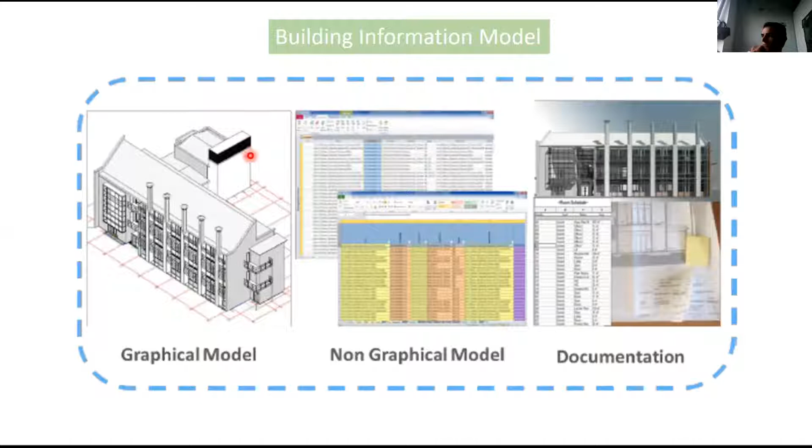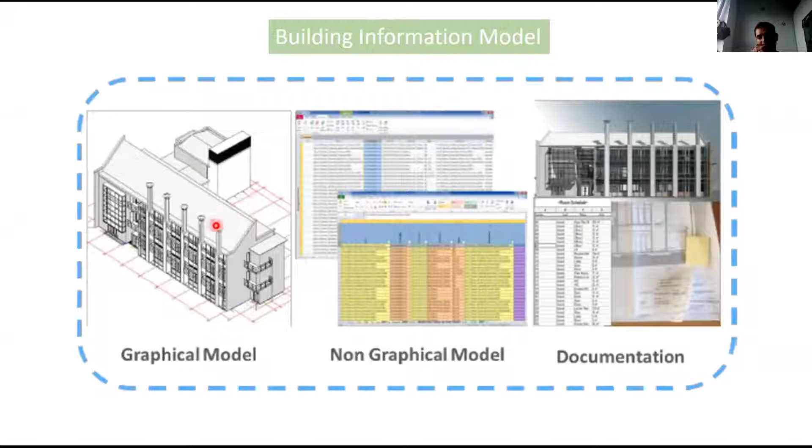The graphical models are developed in specific BIM authoring software using object-based technology to simulate the real world. This is different from 2D software like AutoCAD or even Vectorworks, where you have the X and Y axis and the Z. The most important thing is the coordination space, where you can link all the models from the collaborators. So in simple terms, BIM allows users to share project and asset information by mapping that data onto a 3D representation of building components that reside in the model.

The government created a roadmap specifying levels. Most of us know level 0, that is CAD, where we basically have the information on paper. Level 1 is a combination - we start to create specific folders on our server where we save schedules, Word files, PowerPoint. But after that, BIM level 2 standards start to appear, just to unify how we share information with engineers and architects.

And the next step is level 3, just to get an idea. Many of you are using Google Docs now, where many of you can access the same file in the cloud. That's the concept of BIM, or the goal of BIM - to use the cloud and have everyone store and work in the cloud.

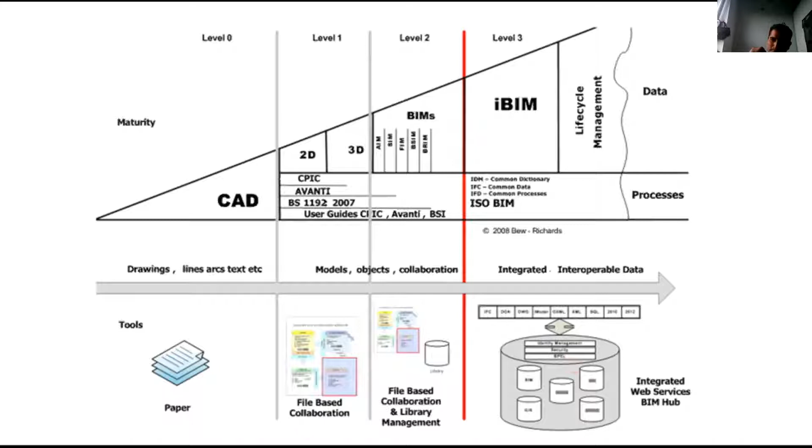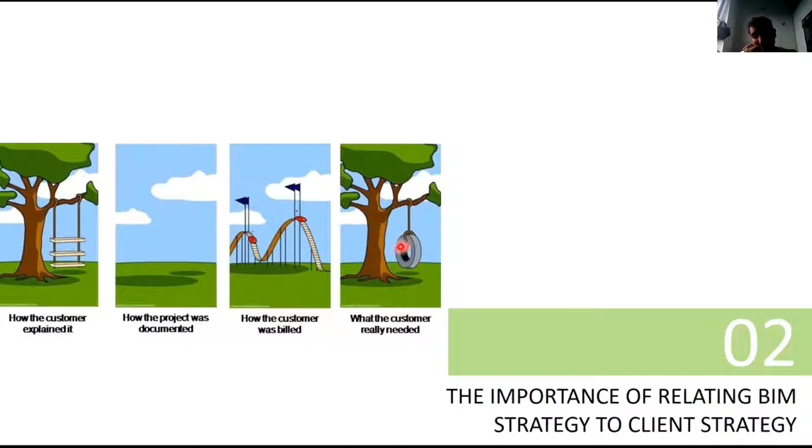If BIM is not aligned with client business priorities. The strategy for implementing it will become skewed towards improving internal and collaborative efficiency, instead of maximizing its overall effectiveness on behalf of the client. Instead, BIM strategy should, within the constraint of available time and resources, aim to maximize the value of the technology for both the client and the project team.

We start the conceptual design. Because BIM covers the whole life cycle, once we get the detailed design, we start to create the analysis and document all the process. But after fabrication starts, for the manufacturers it should come from Revit or another BIM software. When I say BIM, it's related to - could be ArchiCAD, Vectorworks, Revit. So it's not only one product, it's the way that the information is modeled.

So many times - I don't remember the building - but near the Thames, there is a new building, I think about 2 years ago, very close to the Thames, where the shape is very organic, all glass. Every single window is bespoke, and only 2 companies in Europe can achieve this kind of accuracy to cut every little angle of that facade. That's thanks to how the information is transferred from Revit to the fabrication.

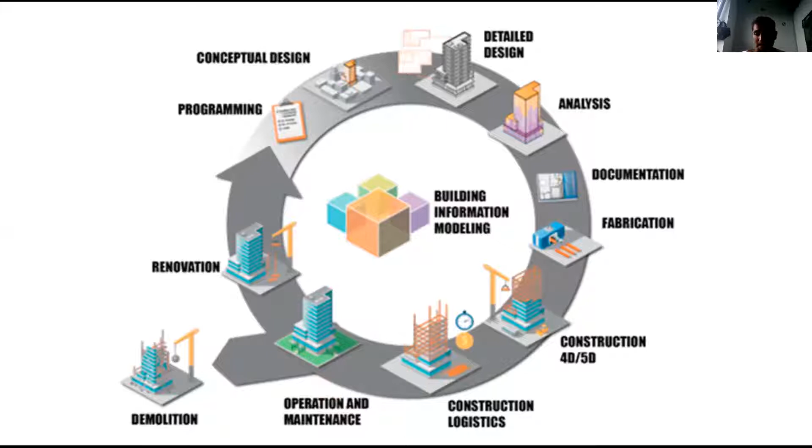But after that, as an architect or engineer, the project continues through life through construction, logistics, operation and maintenance, and that's where it starts to be more efficient for the BIM product - to facilitate the review of design options by automating the production of room data sheets from BIM, thereby significantly reducing the requirement for manual data. For every pound spent in design, 20 pounds is spent during construction, and 60 pounds is spent during its operational life. That means the operator can potentially save more in operation to pay for a better design and build process with BIM. So what we call BIM bam boom is better design, better construction, and better operation.

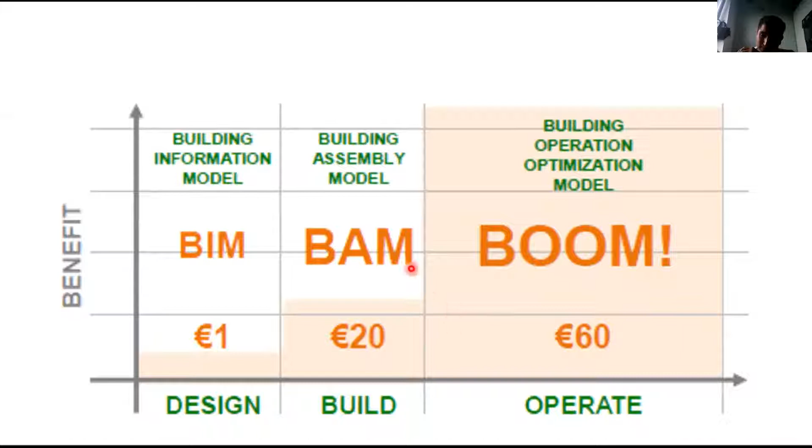Paperless job sites are something companies began implementing a few years ago. We are progressively moving towards the use of mobile applications, with multiple users accessing a database of information for quality control, verification of installations, and writing daily construction reports. You can go with your tablet and download information from the cloud and see all the parameters of an item or an object, because every asset's information will be stored in one single file.

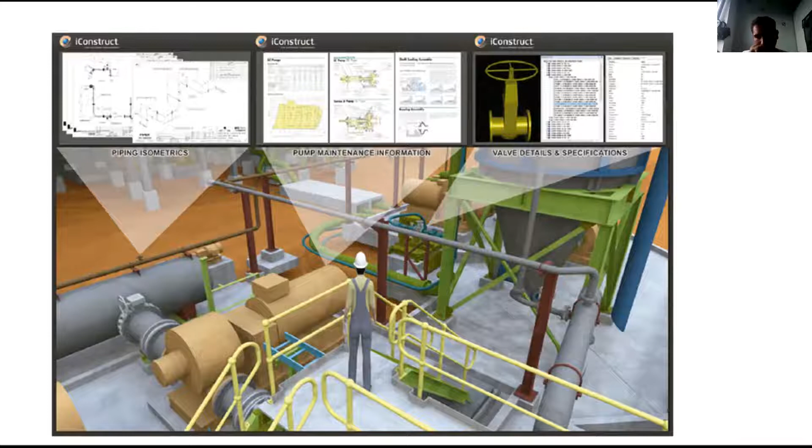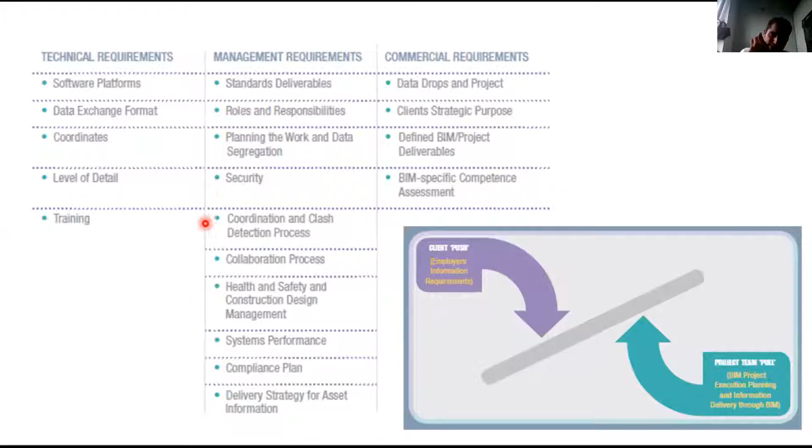To achieve that, one of the challenges when implementing BIM in a company is the information that the client provides to us. The process is that the client needs to provide us the Employer's Information Requirements. That basically is what they expect from us, or how we can deliver BIM to them. In that document, it talks about which software we are using, the level of detail we are providing, and the roles and responsibilities. All this is our response to the client through a document called the BIM Execution Plan.

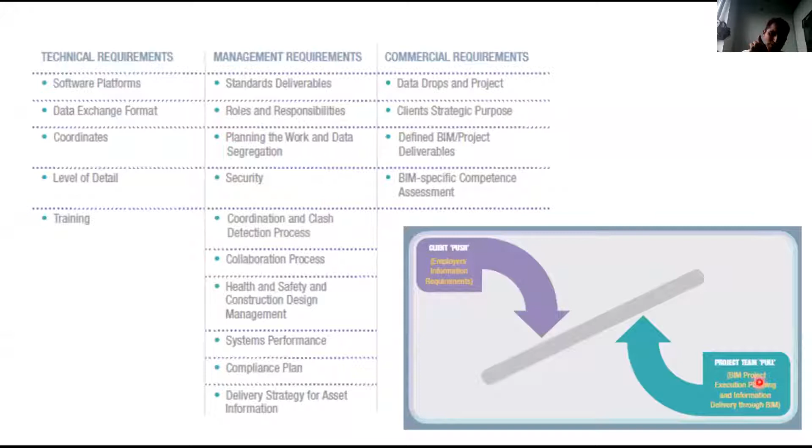That sounds very beautiful, but the expectation and the reality are totally different, because so many companies fall into a pitfall where they don't invest enough to implement BIM. I had the example of a company I was working with that produced a very detailed model in a luxury residential project, but at the end they lost money because they implemented BIM without any expert. I mean, to implement BIM, we need a person who supports us in every step of the roadmap.

For the implementation of BIM to deliver measurable success, there is considerable evidence that the innovation pushed together with the technology facilitates beneficial change. So once we got BIM, we need to consider where we are, which employees, or the skills that our staff has.

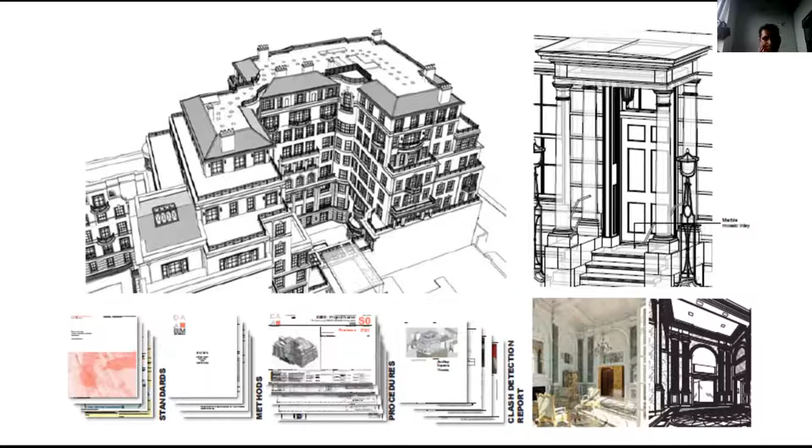So that's an example of how a project could be broken down into different models, and that's giving you an idea of how things are connected to each other.

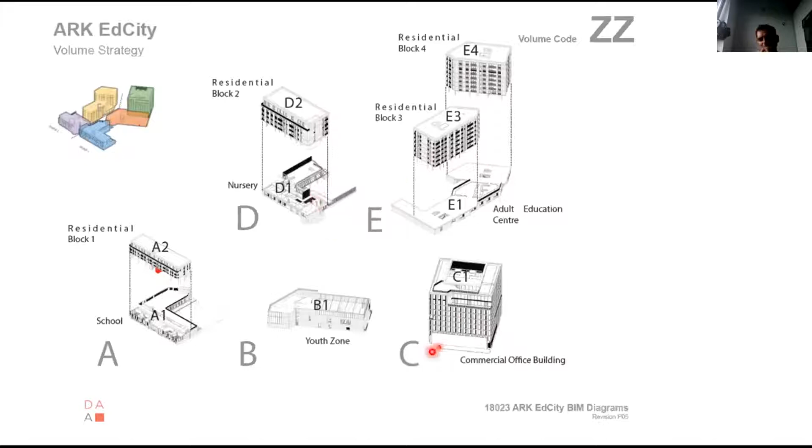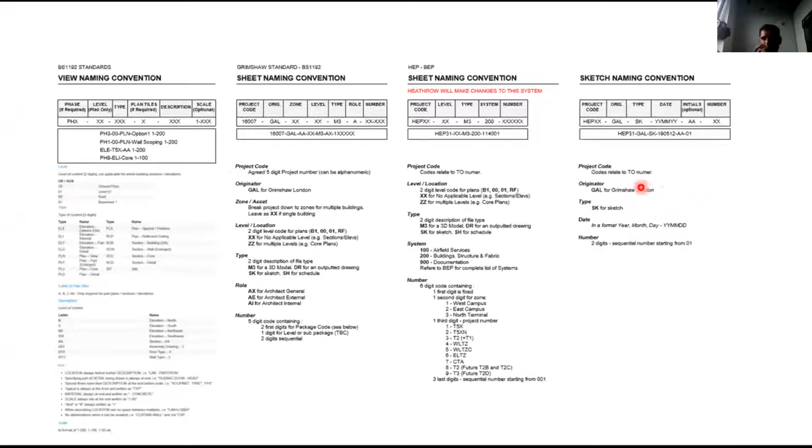So here basically the way we need to care about the naming convention, the sheet naming convention, it's like in CAD, but in BIM there are more standards we have to follow. And that's basically because we need to collaborate with engineers, and that's a very standardized method of producing the information.

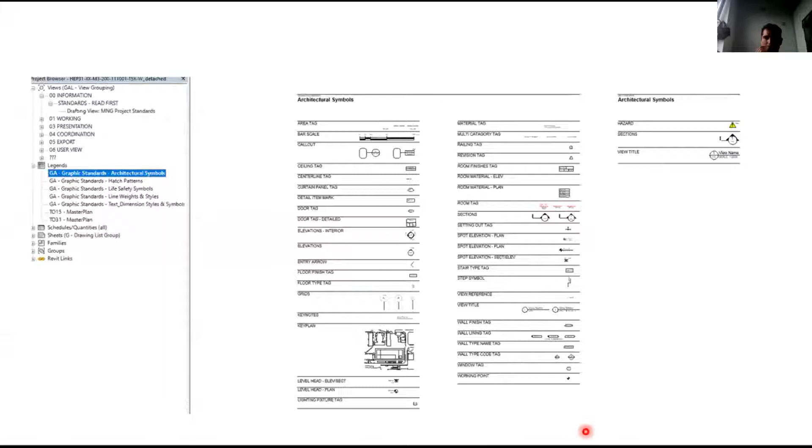One of the challenges of BIM is that in CAD we have such a big library that we can adopt families from everywhere. But in BIM it's something different: every company is starting from scratch with the library, and that's a big challenge for many companies because people are still using or adopting BIM strategies for the company.

Is your organization improving their BIM skills overall? Yes. It's more common that companies are investing money in, for example, design technology teams where they provide solutions for the whole company with BIM and for BIM.

Is the BIM implementation going in the right direction? Yeah, definitely, people agree that's the present and the future. And should your organization be more strategic about BIM across the office? Yes, that's definitely another topic in each company I was working in.

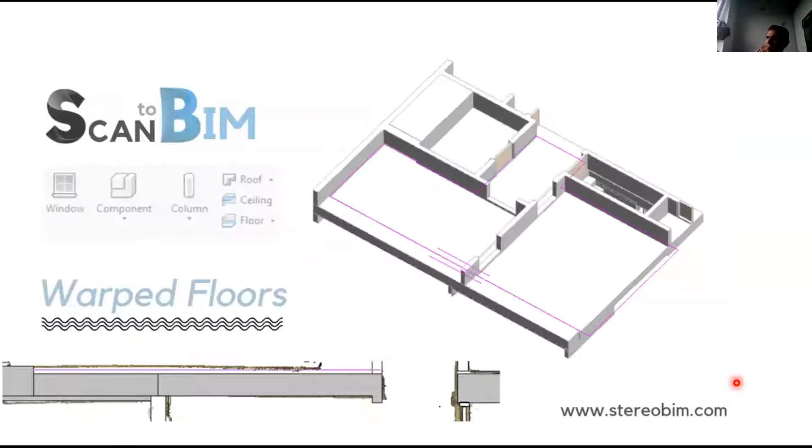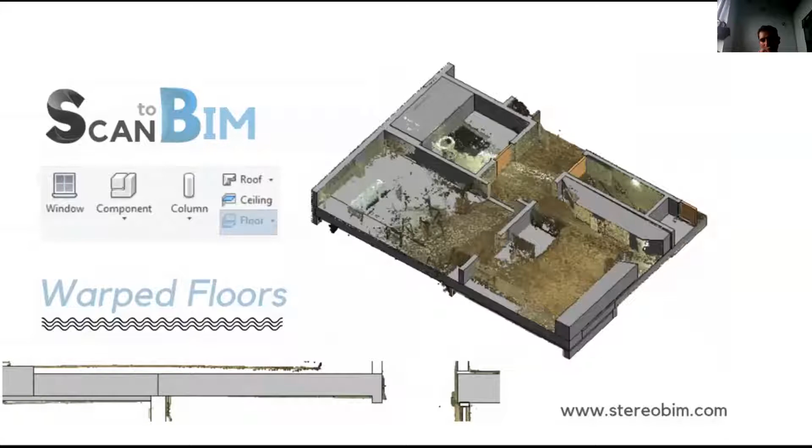One of the tools is the scan, the possibility to scan your room, just to highlight an example, with your phone or with a laser scan, and in BIM you can recreate it all in the model, or even with parametric tools where with simple dots you can create a stadium roof or very complex shape with a few steps.

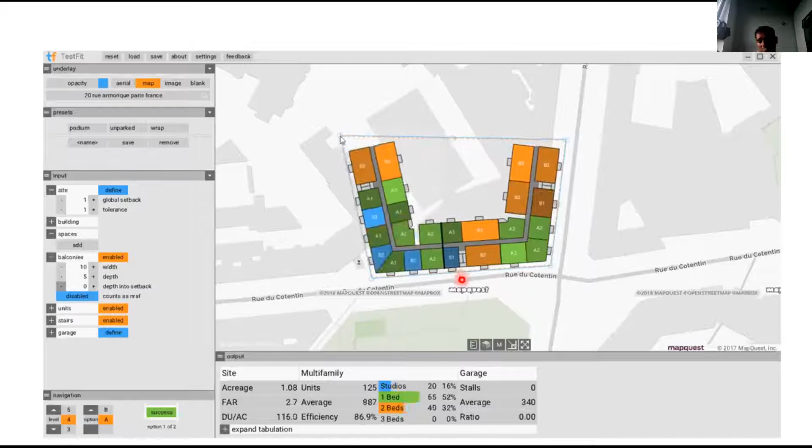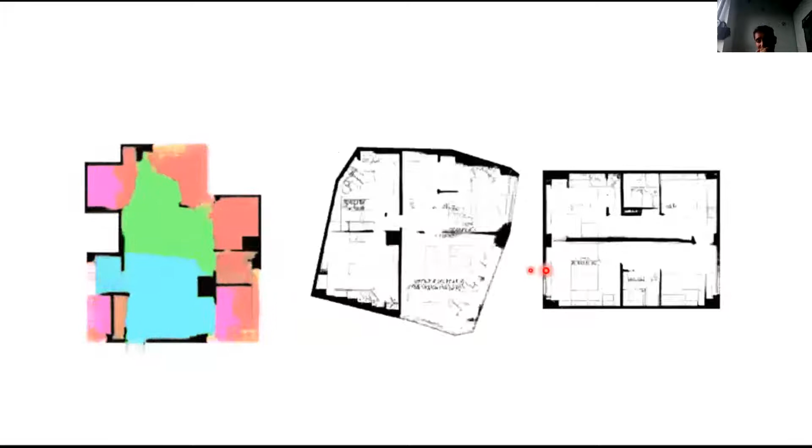We can achieve this as well with data management. We can create such a, in my opinion, constrained building, but it could provide a quick solution for planning, for concept stages, giving the client quick visibility of what they want to achieve. That's the complexity of the automatization of the new era, where simple numbers are combined to give you the best answer for the client.

So we've got several options where we can discuss again with the client, and in a few minutes we can get like 20-25 results per session. But it's true that all this has a long process, but in the long term it will be worth it, especially when you establish your own workflow for other projects.

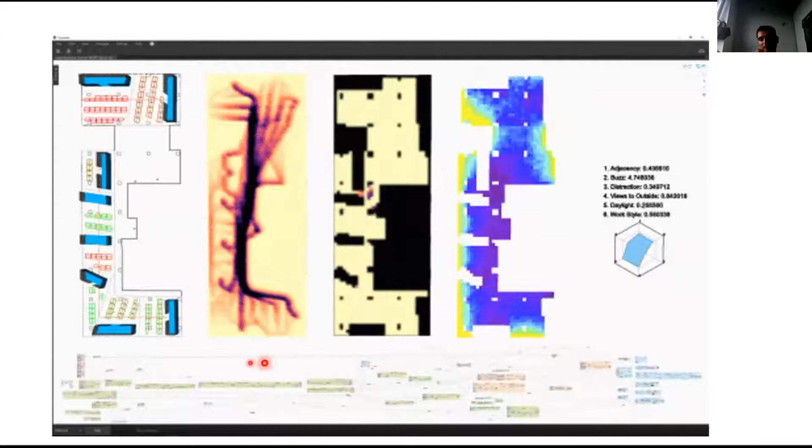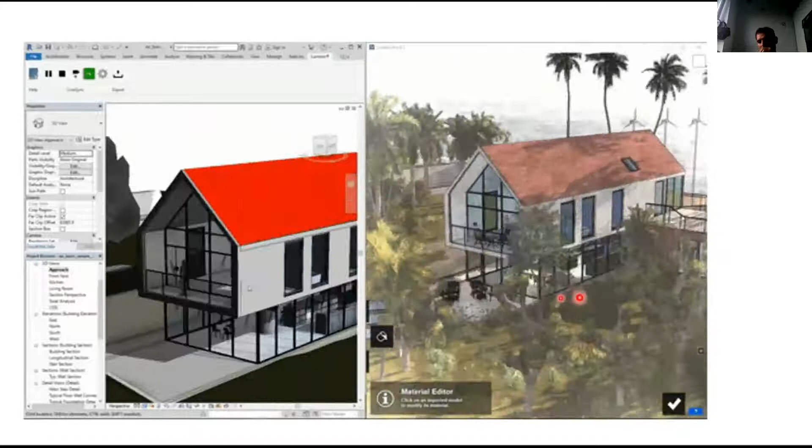Regarding visualization, it's more often that BIM contains third-party plugins where you can visualize in real time. At the same time, your client can see the house with a mobile. The software analysis tools are improving as well a lot in BIM, where you can immediately know the impact of the lighting in your building.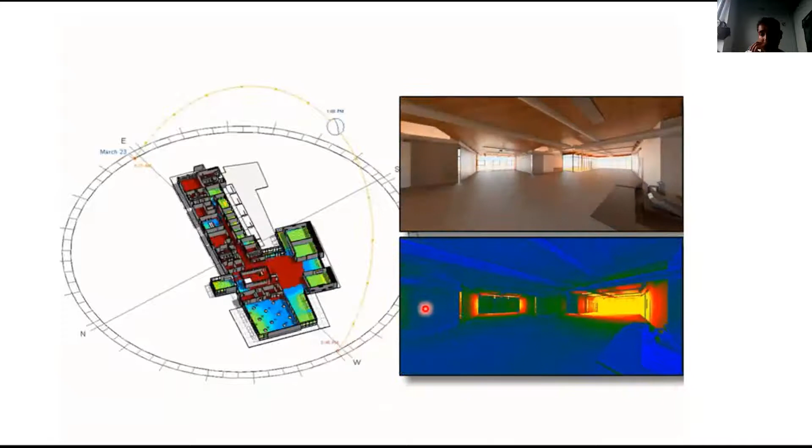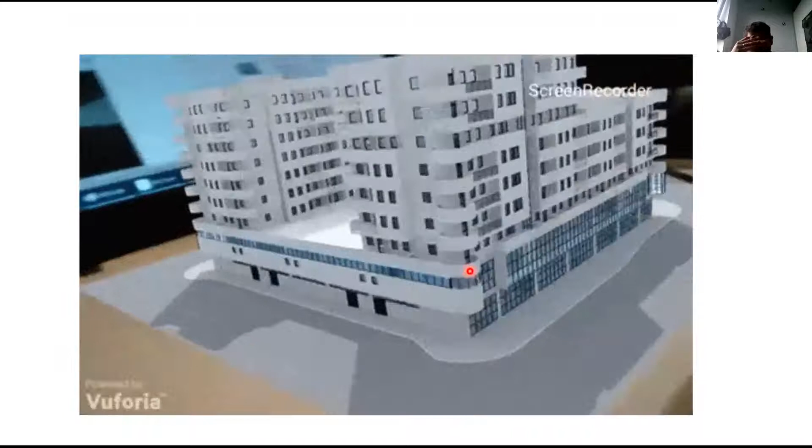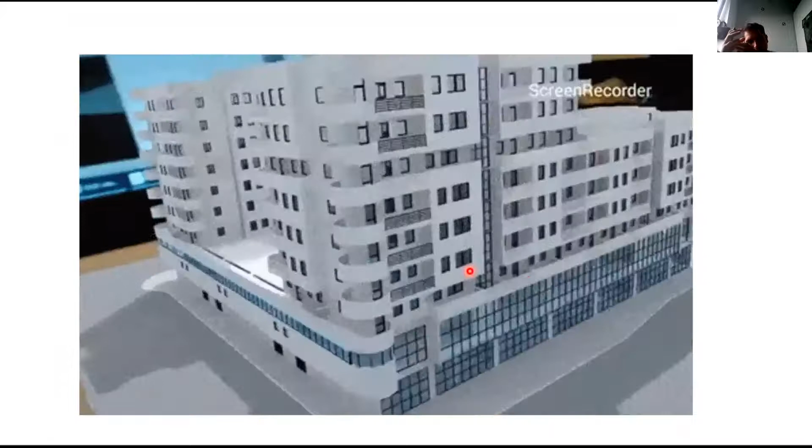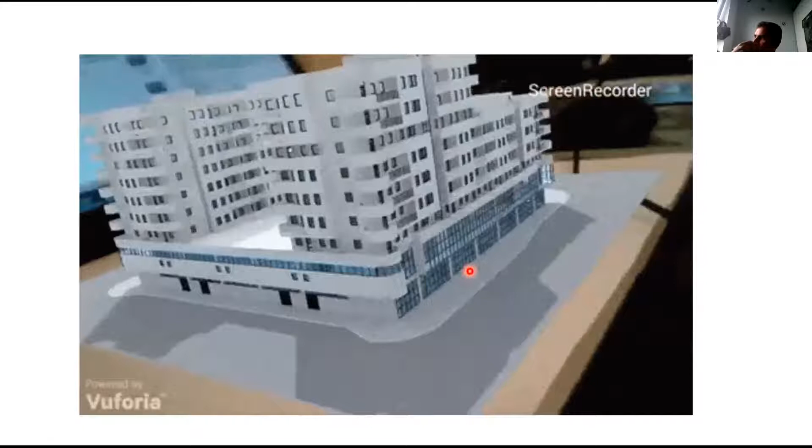The augmented reality we had in the consultation period in the Heathrow project was very cool because people just get an immediate idea of the overall project. I remember in the exhibition that was in the Excel building, there were too many people just saying, 'Oh, I think that should be the way people need to present the buildings.'

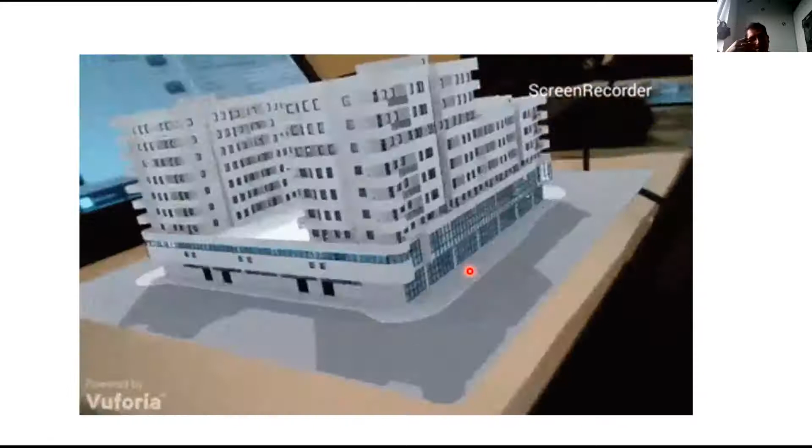I can't disagree because before being an architect, I was a model maker, and I think that until our kids grow up, we still need the physical model. But probably our kids, when they grow up, for them it will be enough just to see the objects in virtual reality.

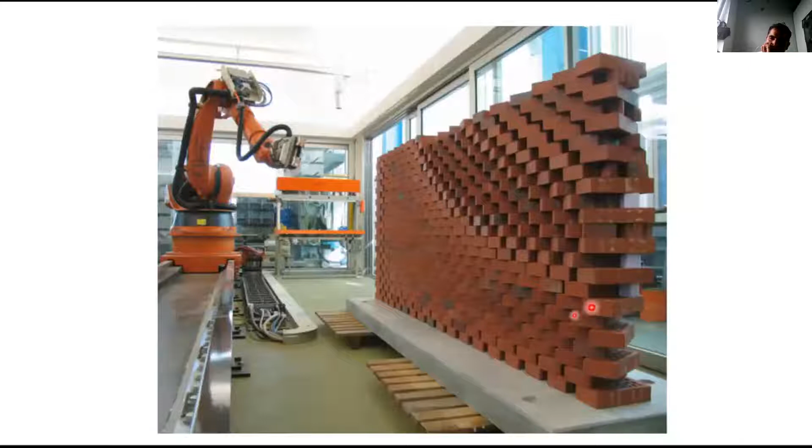And the last is just the fabrication. It's possible to create bridges, complex facades with robotics, and all this information is through the asset information that we transfer from BIM to our machines.

So I think again it has good expectations, but the reality is that all this software in the very beginning is such a pain because, like all new things, people need to dedicate time for training and research on all the tools before applying them in a company.

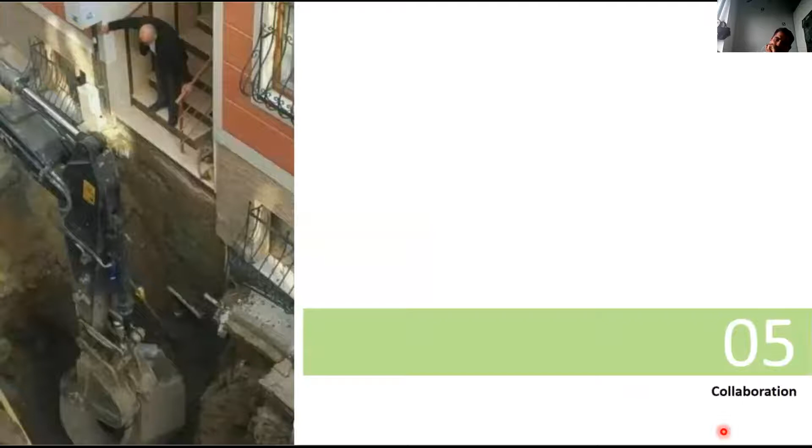The other challenge is the collaboration between consultants, because we are working in a way that we are interacting with our architectural model, and we are interacting with the structural model, the MEP model. So once we get stage 4 finished, the site manager and project manager will start to play with our model, and all this is like a cycle, like the never-ending story.

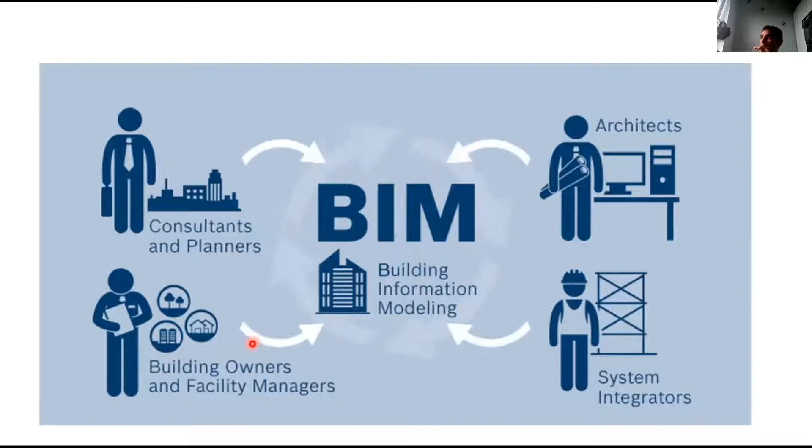Even when the building is finished, the file again is stored, and we will have all the information in one single file.

So we manage all the information through what we call the common data environment, and basically there are 3 or 4 spaces where we work in progress. We start to create our documentation, the schedules, and the model, and we share it in a space for the MEP and structural guys.

So once it's approved, the information could be published, and it will be moved into another data environment called published documentation. If it's rejected, it will go back again, and the file will not be stored in the shared space. This process is just to make sure that the delivery process is going according to the standards and is efficient for the team.

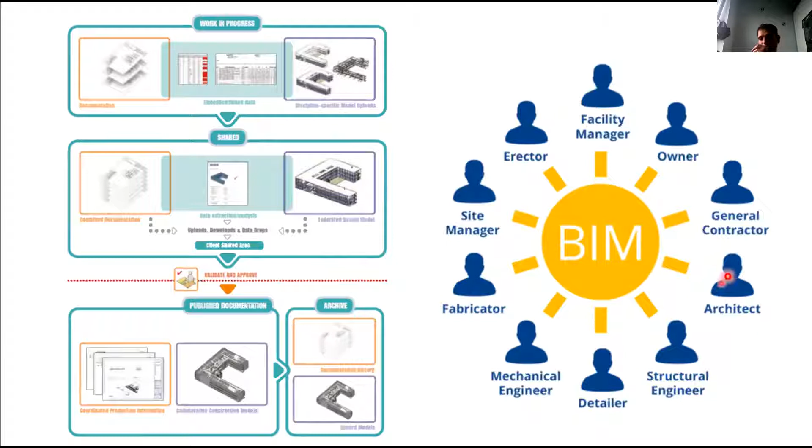So when we publish the documentation at the end of a stage, we can archive it in the stage 3 folder, for example, or stage 4 in the stage 4 folder. And after that, it can be accessible for each stakeholder of the project.

When we are doing the drawings, we have to make sure that we provide the information required, because we cannot over-detail and we cannot under-detail. Obviously, the more information you provide, it can in fact be a way to improve the quality of the building, and fewer questions you will get from the builders or contractors.

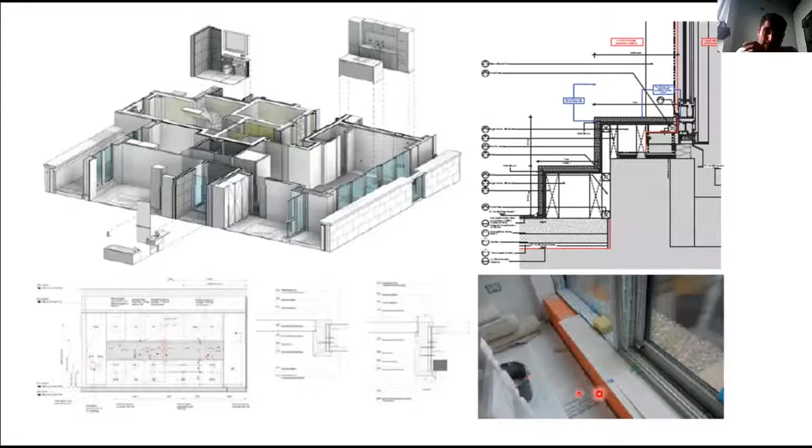And this is an example of the project that I'm working on, near Clapham Junction. That's B&Q and Homebase, and there are 18 buildings.

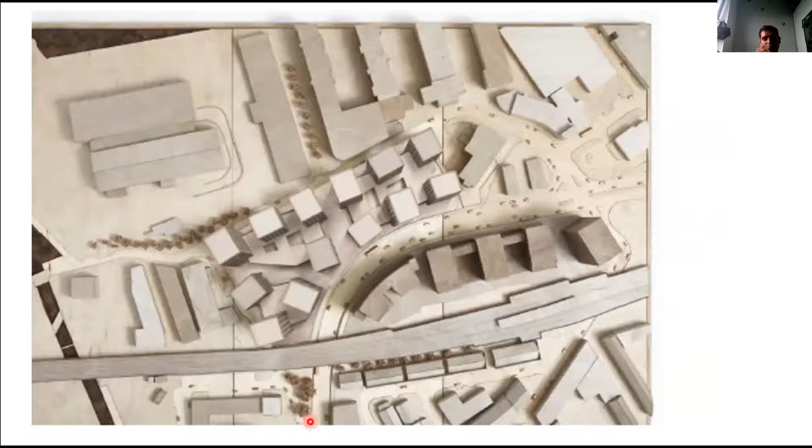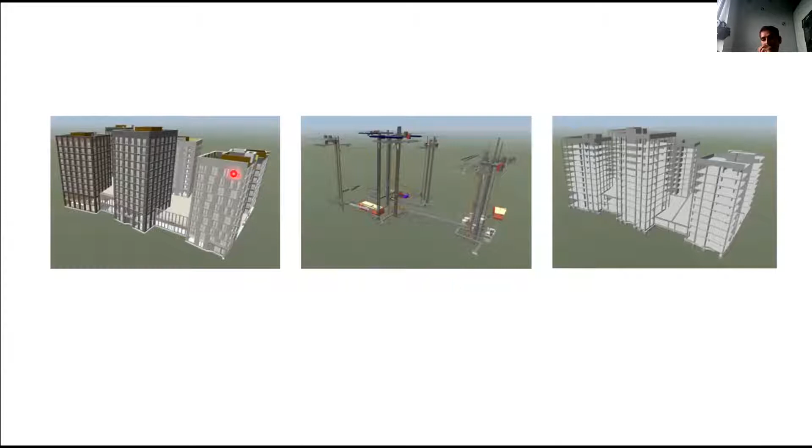Coordinating them is a big challenge, because we are working with Ramboll and Hoare Lea as consultants, and now we are providing a new tool that is improving our way to communicate

and reduce email. So as you see here, we've got the three models: structural, mechanical, and architectural. Just an example of how we use a software that is reading the Building Information Modeling. From here, we are doing the clash detections and providing to another software that makes it easier the way that we communicate. And the first question you can have is, why are we using so many software? Of course, because BIM is something relatively new, and each software is implementing others.

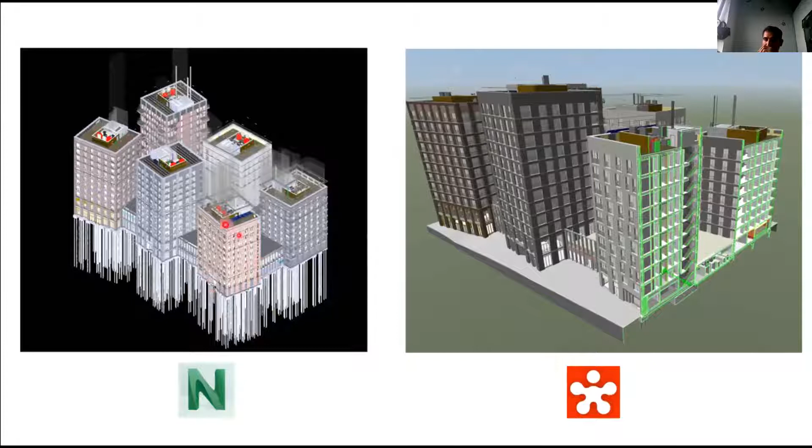So I assume that next year, probably this software will supersede this one. But Navisworks now is providing us not only clash detection, but also managing the cost of the building and the timeline production. So we'll see a bit of that in a sec.

So that's Revizto. The way that we communicate is just live. So I just add a stamp, and I can tell the engineer, please look at this. At the same time, he's receiving the information and he can respond. So all this is issue tracking that will be stored in the cloud.

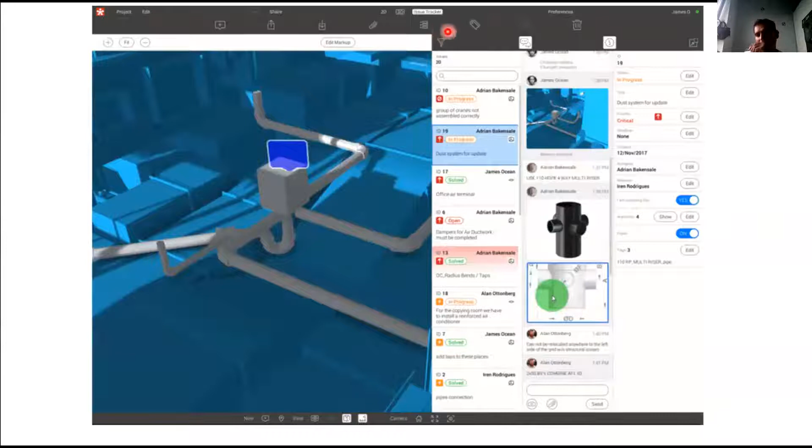So we will get rid of thousands of emails, and through the filters it will be very quick to spot the issue, who it was assigned to, and the priority. It will be just highlighted when it's achieved or if it's in progress, and for coordination that's a very, very fantastic tool.

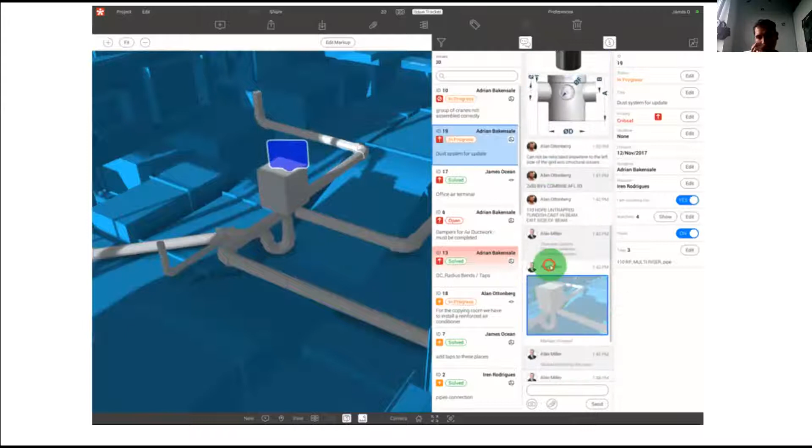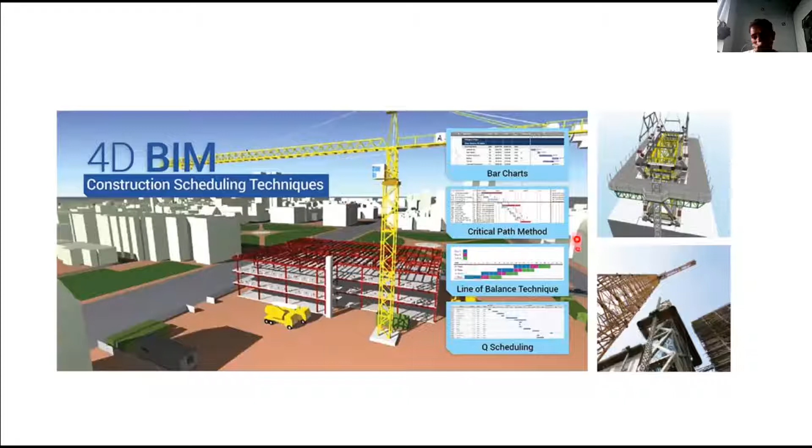As I said before, Navisworks has something that Revizto doesn't have: the tool for scheduling the construction. So Navisworks can provide schedules, line of balance techniques, and very useful and powerful tools just to get your construction a success.

And that's before the construction, but during the construction, there are tools where you can have your 3D model and compare the stage you are in with what's coming next, and you can identify problems before they happen.

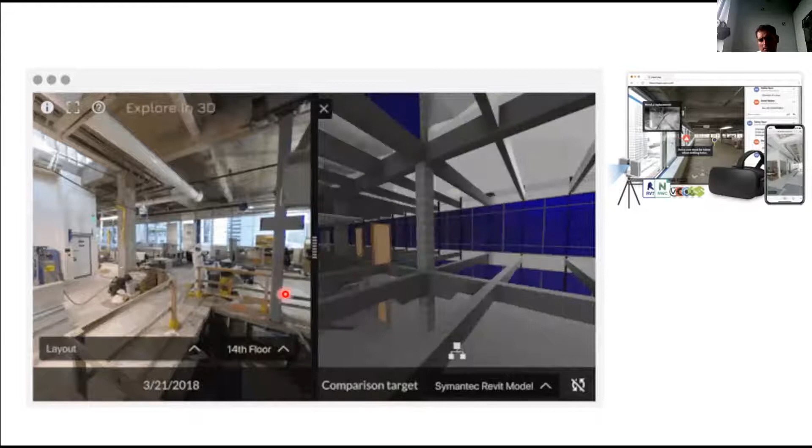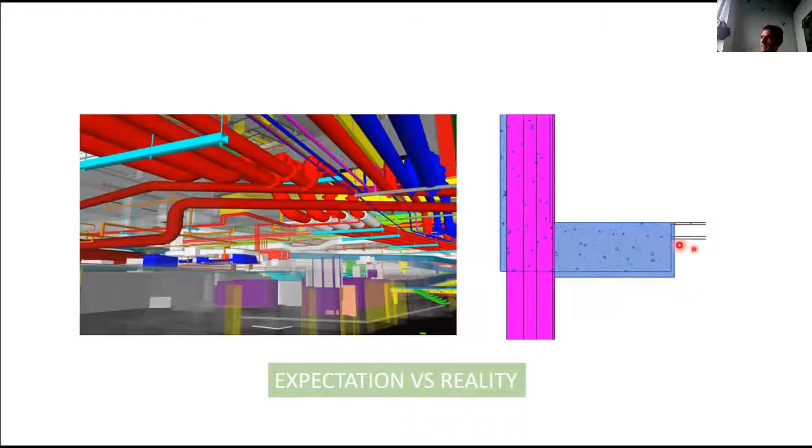And regarding collaboration, again, the expectation is to have nice, clean clash detection between the elements. But the reality is that it's a big challenge to get everything nice, because that should be accordingly to the skills and the tools that the company has.

So this is a diagram where you can see the first time how long it takes in comparison with our CAD tools. But once we get the maturity level to provide our BIM model, it will be saved nearly 35% in the second project. Probably you will see the 35% of benefits.

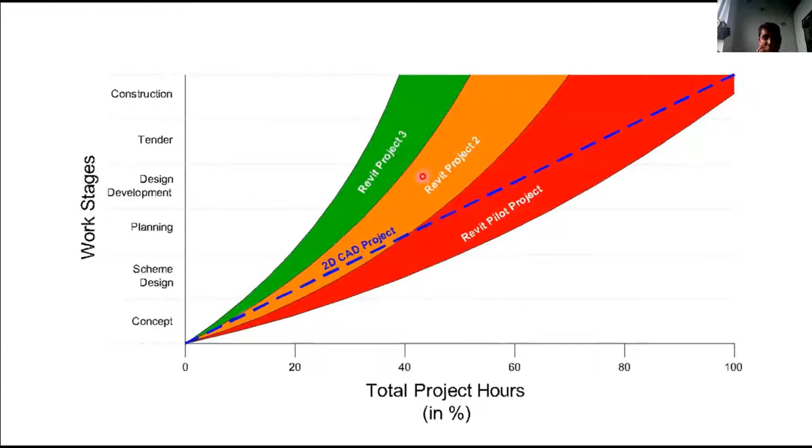And through the work stages, in some projects like planning and master plans, BIM is still, in my opinion, in need of improvement. But I think in other project types it's the best solution. I mean, you have Vectorworks, ArchiCAD, and Revit, and there isn't a tool you can say is definitively the best, because normally the tools move with the market, and we are in a market that is more Autodesk-oriented. Probably if you work on a project in Germany, you will move more towards, or use more, ArchiCAD or Vectorworks. There's not a big difference in price, but well,

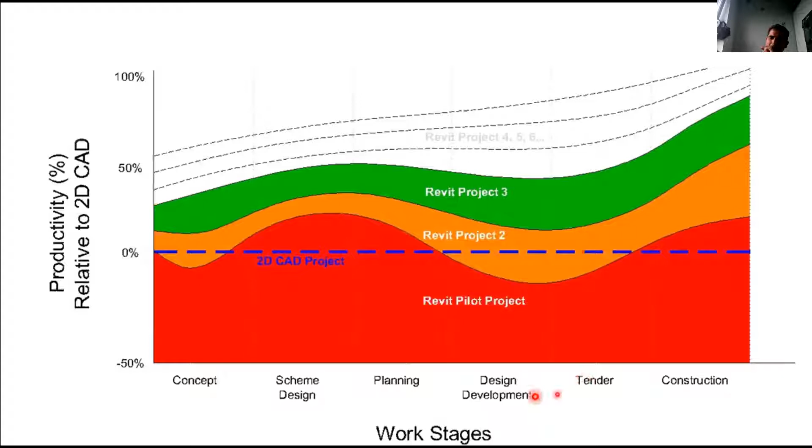all this is just to improve with the client and get benefits. So from our side, it will be better outcomes through collaboration and enhanced performance, optimized solutions, greater predictability, faster project delivery, and reduced safety risk—that's important—and reduced waste. And for the client, it's nearly the same.

So both, I think we've got no reason not to adopt BIM, just considering all the challenges that adopting BIM in our companies means.

So now I'm just open to some questions. I'm very happy to answer all your concerns about what BIM means in our life.

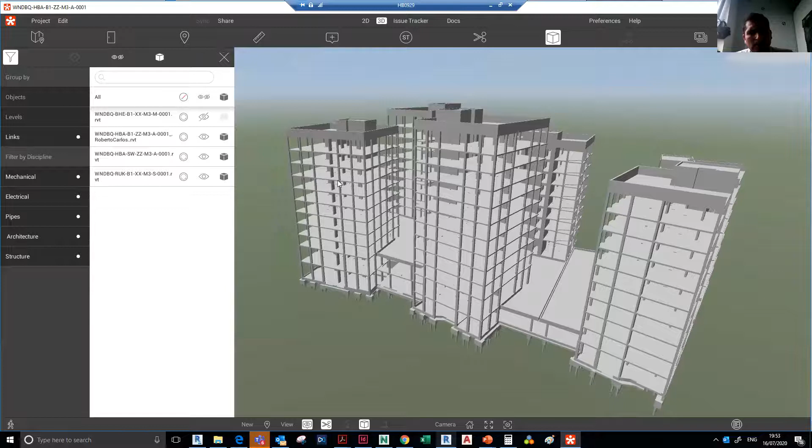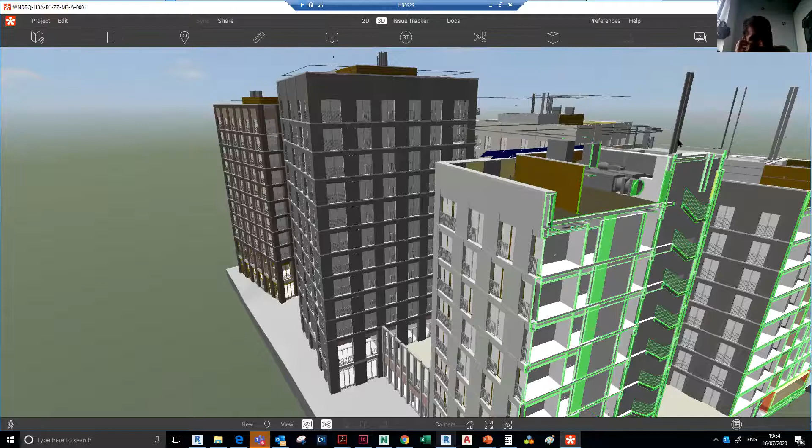So in this example I've got all the buildings and I can manage and quickly spot all the elements clashing with each other. If I go to an element, as you see, this file contains basic surfaces, and if I click one element we will see the information for that element.

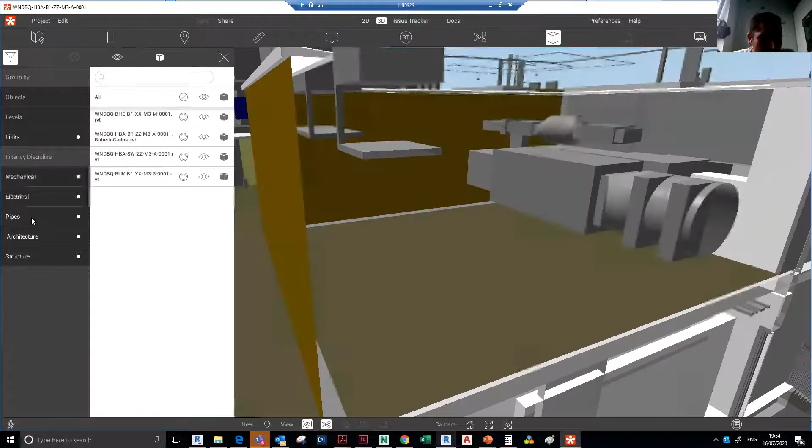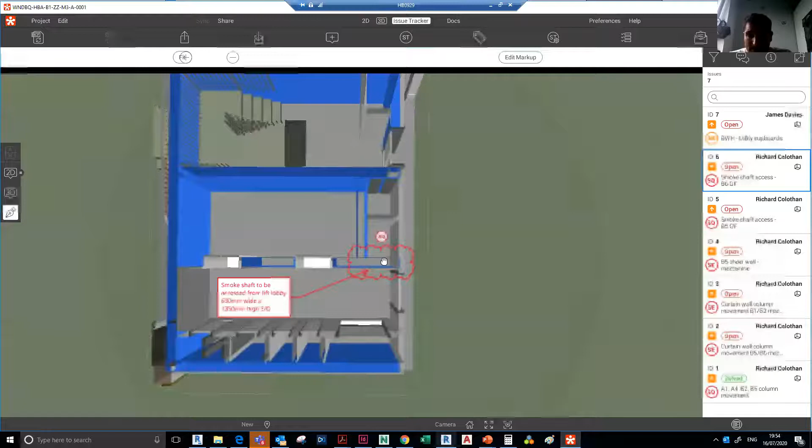So let's pick this, for example - no, sorry, pipes. So we've got this element here, and if I click here, it's like a fan. Yes, but let's hold on a second, because from here to see the element...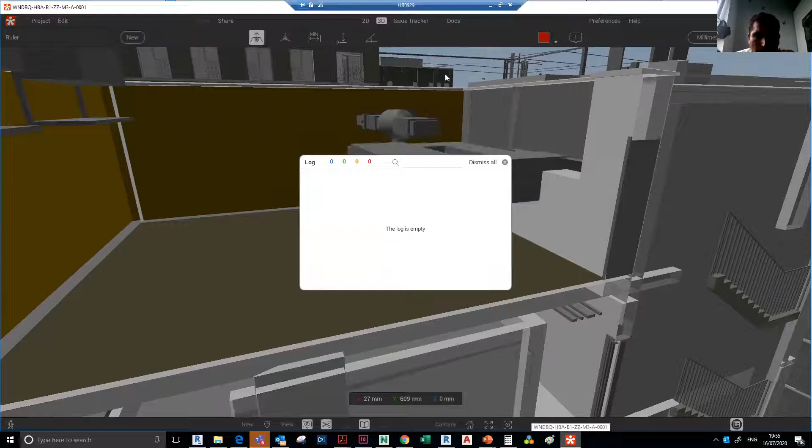I'm just wondering, where is the information here? Well, the documentation should be... oh, that's such a pain. This is a product we are implementing now, called Revizto. So I've got from my Revit, I upload here the information, and I tried to get the information for that element, but for some reason I didn't manage to.

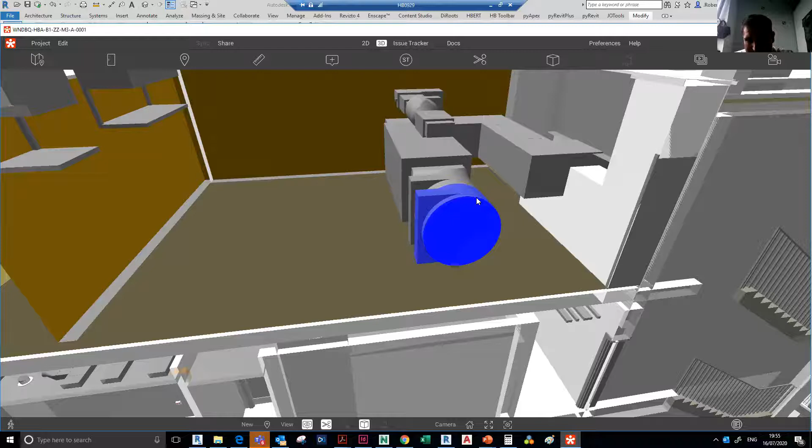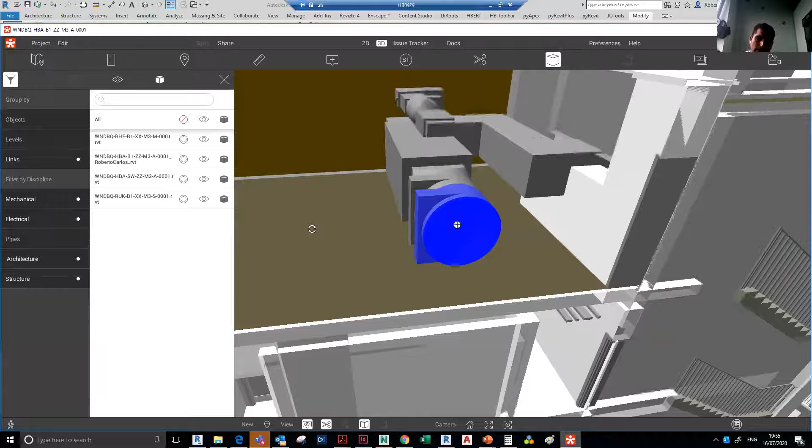So if I just press the element, in the new version it will provide every single parameter that this element contains - it will tell me who is the manufacturer, the telephone number, the dimensions, and the height relative to the finished floor level. You have everything about this element, but I think in this version, 0.45, it doesn't yet allow all this information.

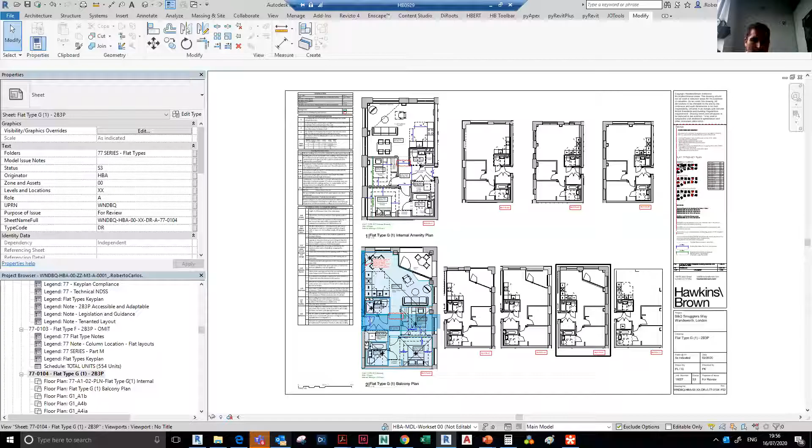But for example, let me come back to my presentation and present Revit. So now again we see our model, and I'll show you, for example, in 3D. I'm opening the 3D element now, and I'll click on an element, and you'll see all the information that element has. That's what happens when we export that element - the tool you want to export it to will be provided that information.

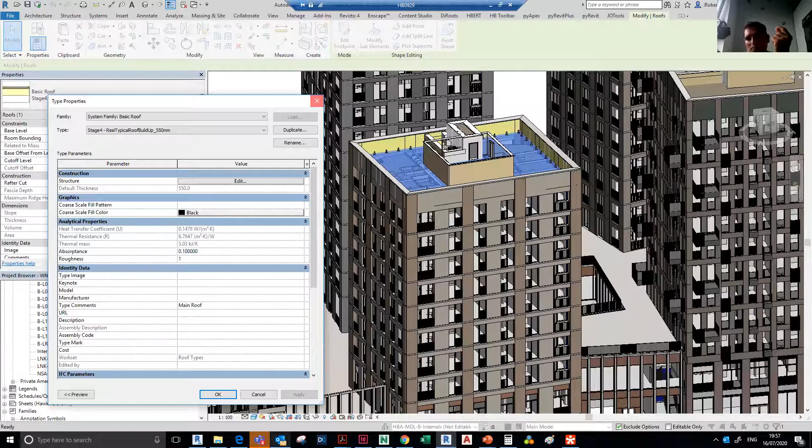For example, here I'm going to the roof, and I've got the roof's base level, thickness, volume, area, and more. I can add multiple parameters - heat transfer, thermal resistance, thermal mass - all this information, and all that I want to add will be exported with the file. That's the potential of BIM, because it's not just modeling, it's exporting all the information.

Yeah. Can you hear me? Yeah, I can hear you. As it happened, I created a number of questions which by strange coincidence went to Artur rather than to you or to Gosia, who is the leader of this meeting. My question I would probably limit to only one.

Do you have any experience in retrospective BIM, i.e. when you have a structure already existing and you are trying to create a retrospective BIM for the structure, including all the systems installed in the building, in order to facilitate future management of the assets associated with this particular building? Do you have experience with that?

When you mean retrospective, I can think of, for example, the Waltham Forest Town Hall we are developing now. That's an existing, protected building. We've got all the structure. What we had to do in that building was first scan it. So Hawkins Brown contracted, or they provided to us all the information in the cloud, so we got all the elements already placed.

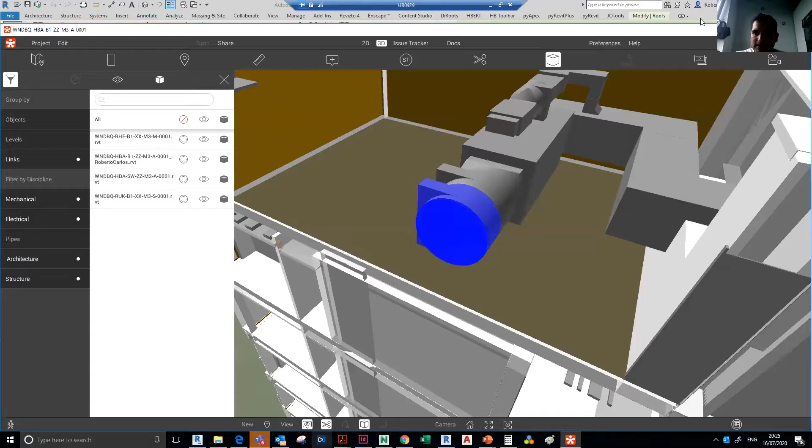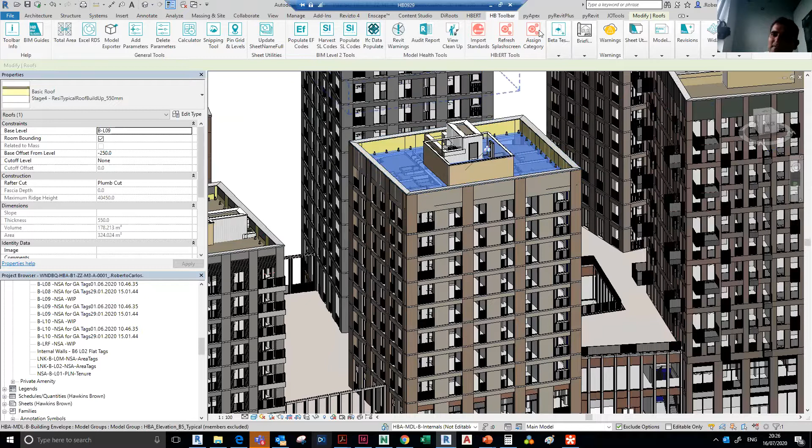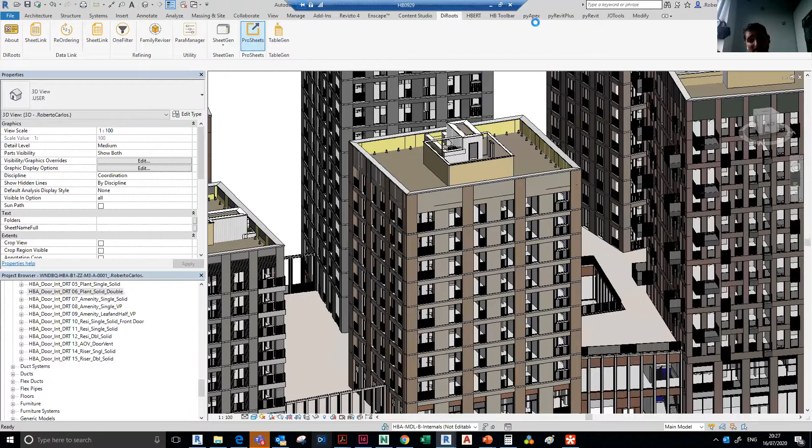But what happens if we've only got a programmer for us? This could happen, because this is a company that started to provide free tools. I've got here something that could sound familiar, because when you want to create sheets in an easy way, you have to click on one and populate one by one. But this is so smart that you can select all the sheets with the prefix and suffix, and this is for free. But this company has another one doing the same job, but they're paying for that. So at the moment, the company has the decision to get rid of paying those guys and get this for free. But what happens?

That's the tricky way. In my opinion it's like WhatsApp. WhatsApp is free, sure, and now nearly 3,000 million people over the world are using WhatsApp. What happens if they decide to use, or just charge the customer £1? They would be multimillionaires. So I think that's the way companies are going, it's crazy, Robert.

I'm not sure where we are heading to. Well, I think I hope you enjoyed it. We did, the presentation, thank you. You're welcome. We are hungry for more information of course, but actually you provided excellent things. We are overwhelmed with your knowledge. Thanks a lot.